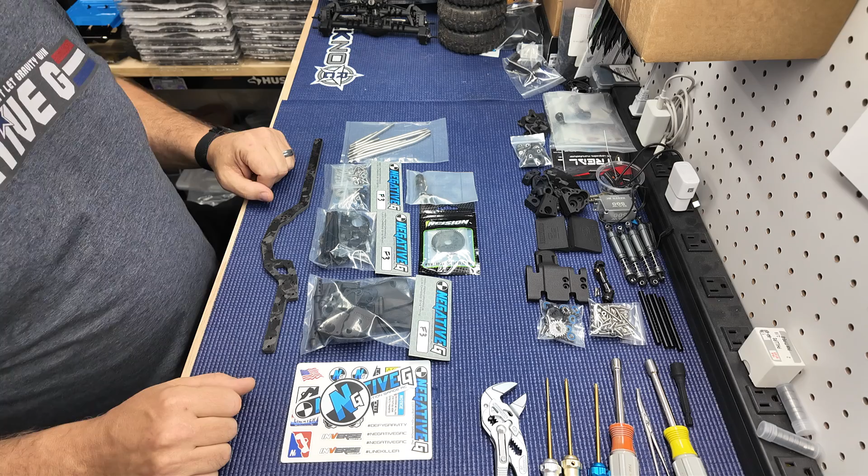Okay, here's the kit overview and contents. You get an XL sticker pack, you get rails of course, you get 3D printed parts - these are all printed on MJF machine and PA12 nylon. You get a hardware bag with screws, gears, shafts and that sort of thing. You get the motor plate bag, which has your motor plate, some carbon shock keys, chassis spacers, and a 2.4 millimeter drill bit.

You get a spur gear, genuine incision 52 tooth spur gear. You get the Negative G branded little baby prop shaft, and also included in the kit is a full set of 5 millimeter diameter titanium links. You also get your choice of servo on axle mount. This version in particular is a Capra, but there's also TRX4 and F10 servo mounts available. You can make your choice on the site when you order, and it will come inside your box. So that's the kit contents overview.

Let's get into the build.

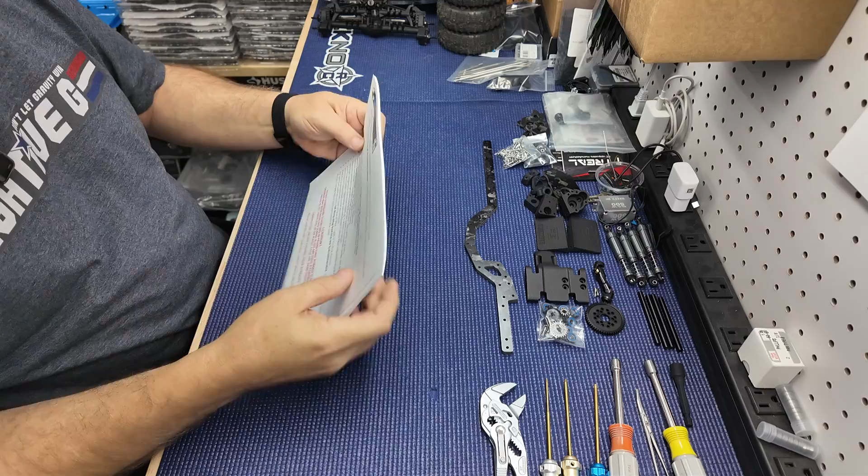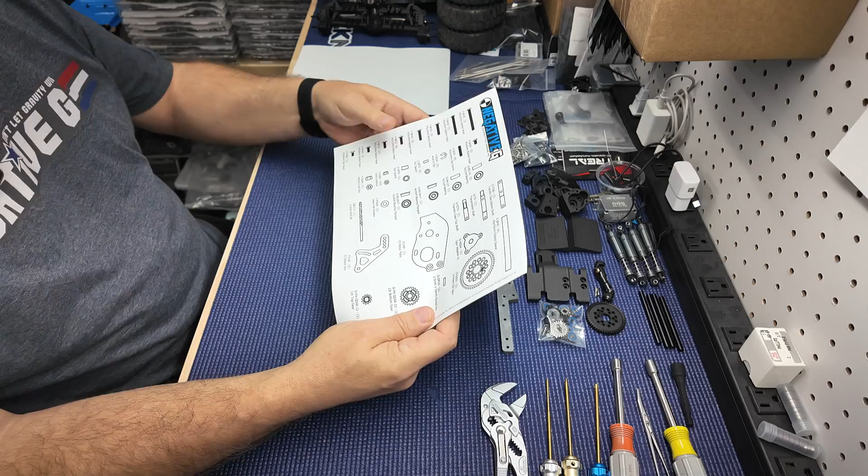If you are new to Negative G kits, you should know that you can go to negativegrc.com and hit the support tab at the top. There is a full set of instructions for all of the different kits available. Page 1 here is just some general information and some cautionary information at the bottom. Make sure you read through all of that, and make sure you read this entire instruction book before you start on your build.

Page 2 is just kind of a hardware overview of what's included in the kit. Page 3, drive shaft length recommendations, and that is pin to pin on the drive shafts. There's a couple different options - some on Amazon that are available. You can check in the Facebook group to get some recommendations from some of the users there, and Conrad has actually posted the cut to length ones that he uses as well.

Page 4, so the drill bit that comes with the kit is used to make sure that there's no support material left in any of the holes that you're putting screws into. You want to make sure that they're clear before you put any screws into them, and make sure you read the red text down here as well.

So page 5 is the transfer case. Anyone that has built a Negative G kit before will recognize this. If you're new, these are fairly straightforward to put together, and I'll show you how to do that. So let's get started. Page 5 is the transfer case, so let's go ahead and get started on that. You want to pay attention to the assembly order for the bottom shaft down here, that's pretty important.

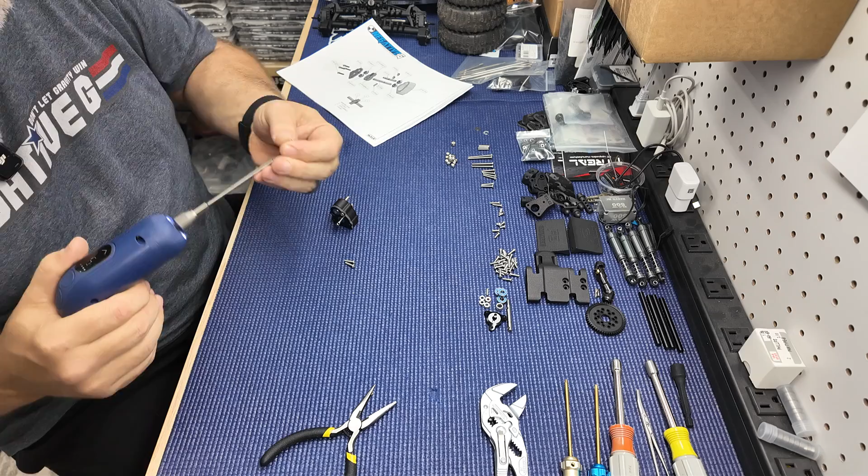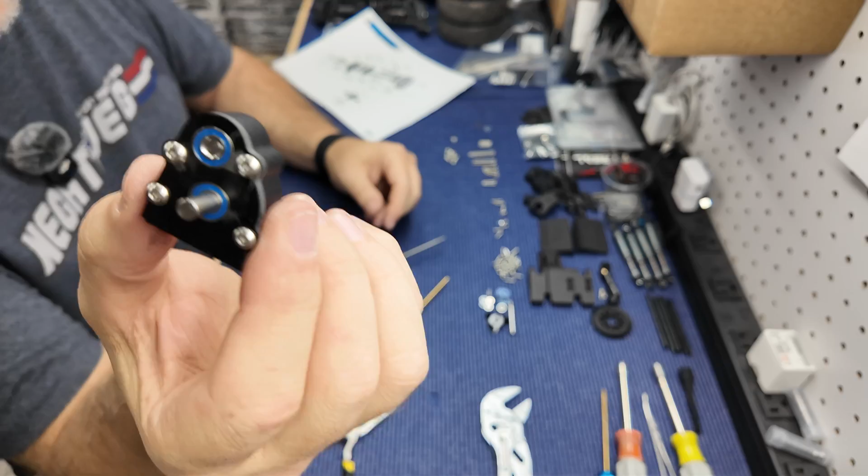And there you have your completed transfer case.

Let's go to page 6. Okay, page 6 is the transmission. Let's get to work on that. You need to pay attention to this note - it says that the part number on this mount needs to face the frame rail.

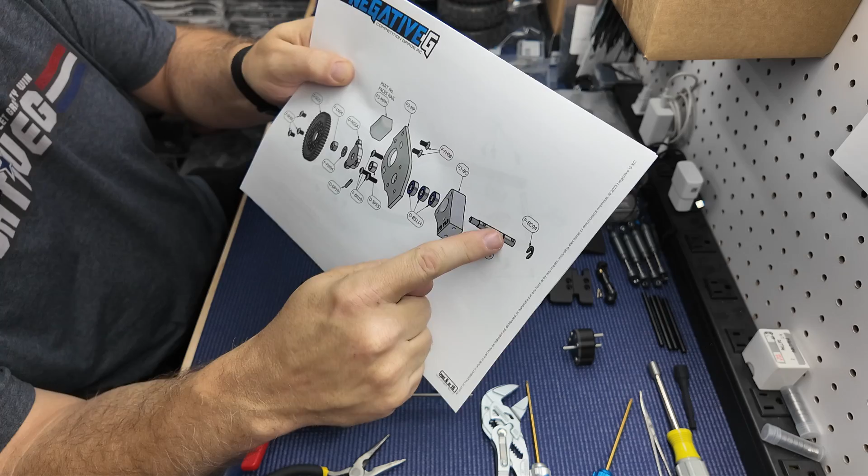There is your completed transmission. Make sure you're using your flathead screws to put that mount on, and just be aware of the order that everything stacks into the bearing case here, and you should be golden.

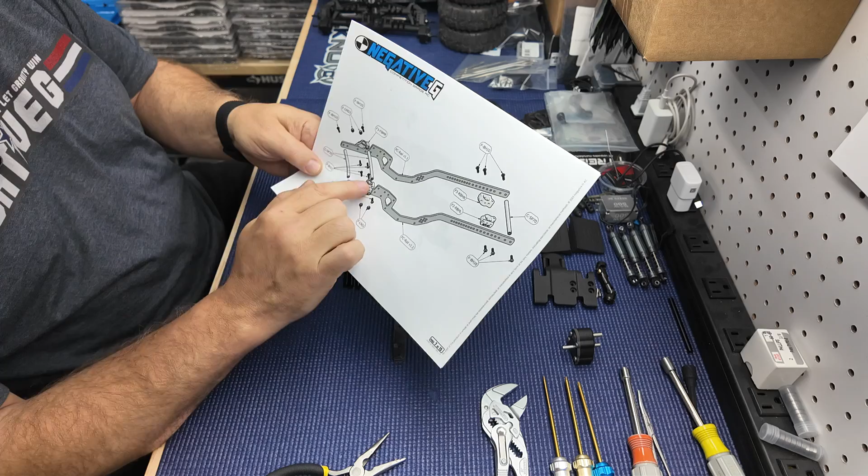So let's move on to page 7. Page 7 is doing a little assembly of the main chassis rails and the body mounts and a few cross members. One thing you need to make sure is read your red text down here - make sure you put the body mounts on before you put the rails onto the spacers. It's a lot easier to get the body posts mounted to the rails before you put the rest of it together.

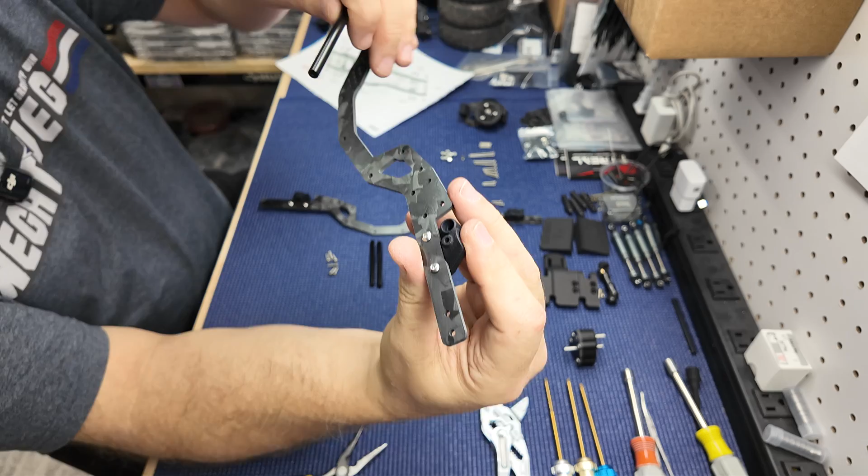You want to put the spacer that goes in between the front body posts first before the other ones, otherwise you won't be able to get it in.

Okay, that's page 7 complete. Let's move on to the next step.

Okay, page 8, installing the transmission into the rails. You need to make sure that you use the 8mm screws on the outside for this motor plate mount. And you need to put half of the prop shaft onto the transmission, otherwise you won't be able to get it onto the transfer case if you don't put it in now. So let's do this step.

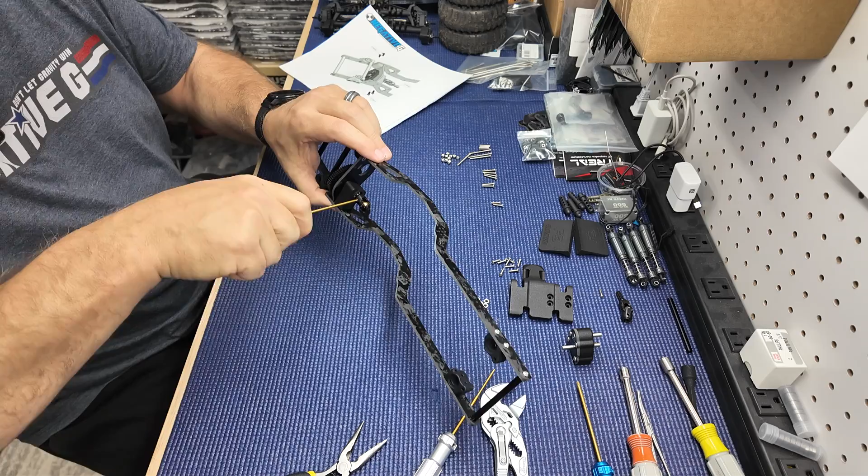And there you have the transmission installed into the chassis. That step is complete. Let's move on to page 9.

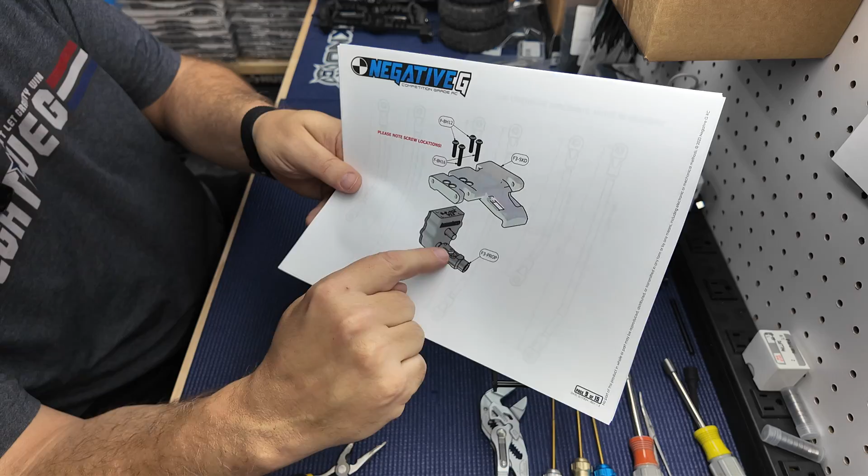Okay, let's move on to page 9. We're installing the transfer case onto the skid. Please note the screw locations - if you put the screws in the wrong holes, you will damage the transfer case housing and you'll have to order a new one. Also put the other half of the prop shaft onto the transfer case at this time.

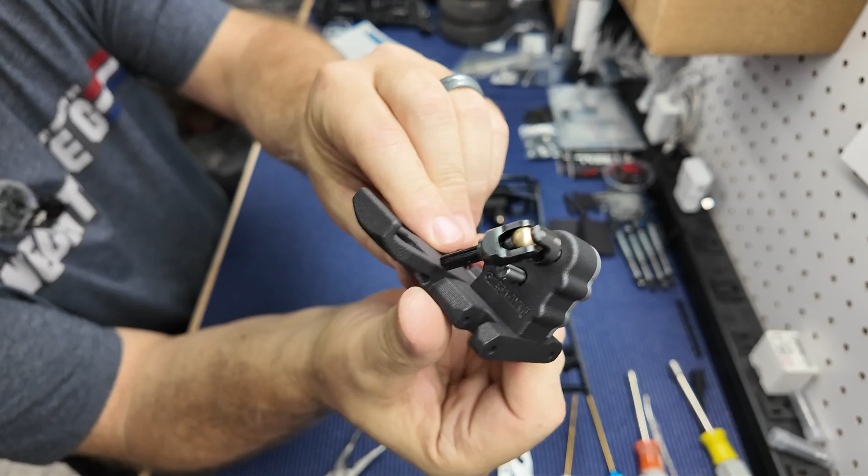And there you have your transfer case mounted to your skid plate. Let's move on to page 10.

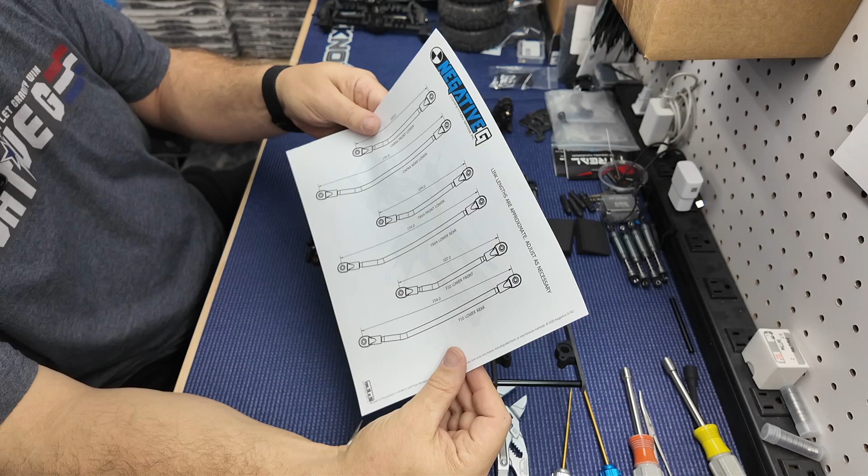Page 10 is the lengths for the lower links. They're all labeled depending on which axles you are using. Pay attention to the lengths. There's two different lengths of these longer links down here, and the long ones are the lowers for the rear, so pay attention to that. I'm going to go ahead and install all of my rod ends off camera because you don't need to watch me do that, so let's get to it.

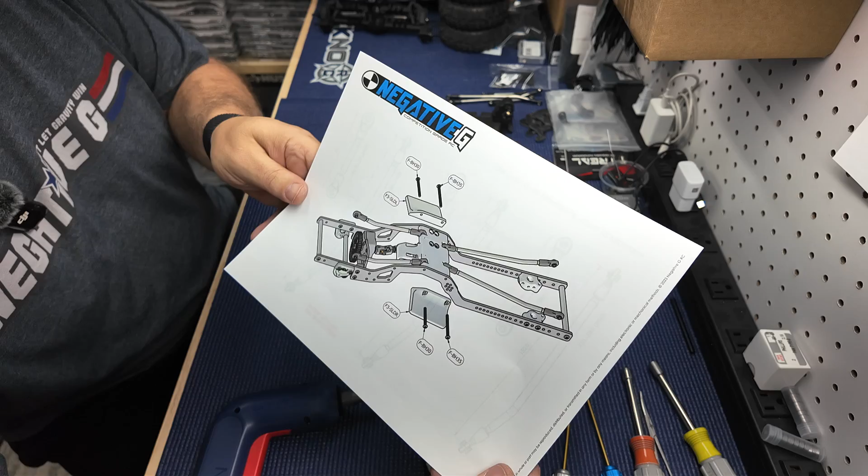Page 11, we're going to install the lower links, the skid, and the sliders all in one shot. So let's do it. Pay attention to the screw lengths. Long ones go in the rear.

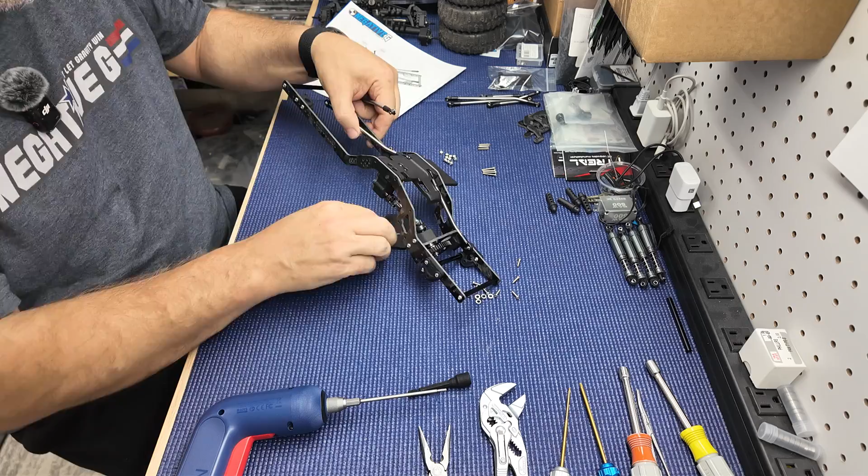Okay, there we go. We've got our lower links installed, our skid installed. So let's move on to page 12.

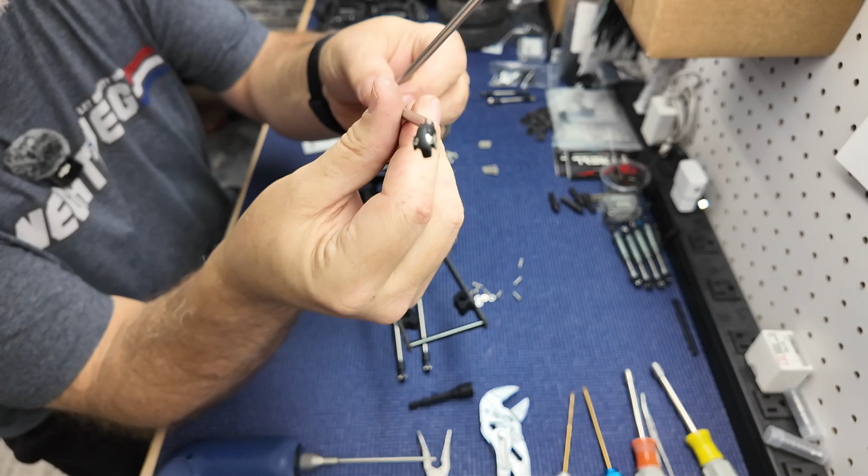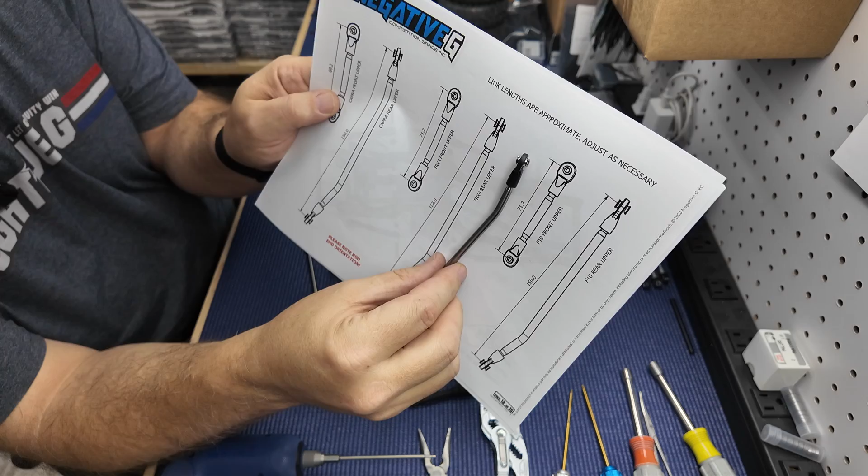Page 12 is all the lengths for the upper links. I've already put mine together, and what you need to pay special attention to is the way these rod ends are clocked. They are clocked 90 degrees from the other ones, if you can see that - you'll be able to see it on the sheet as well. So make sure you clock those rod ends the correct way.

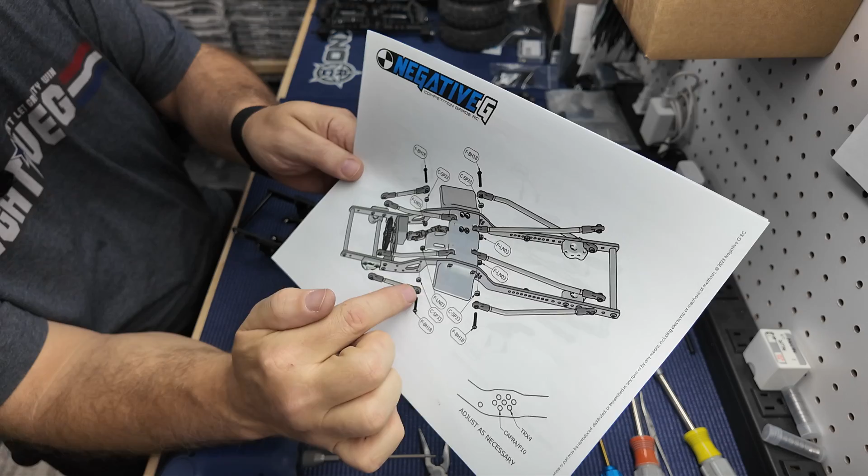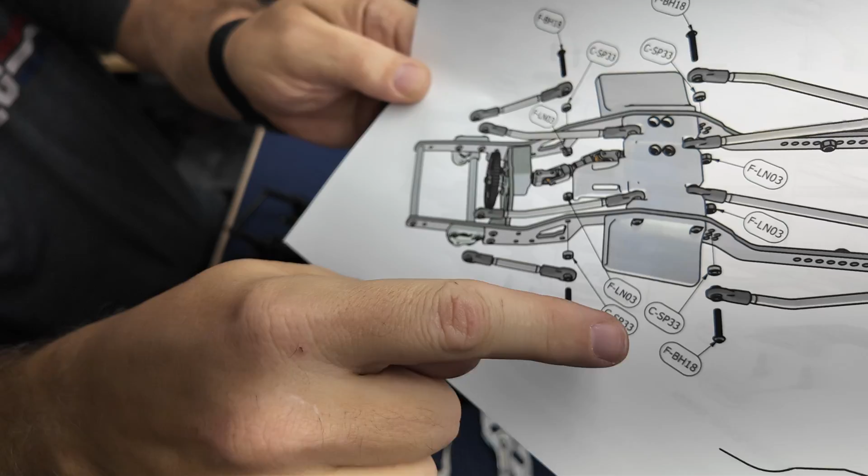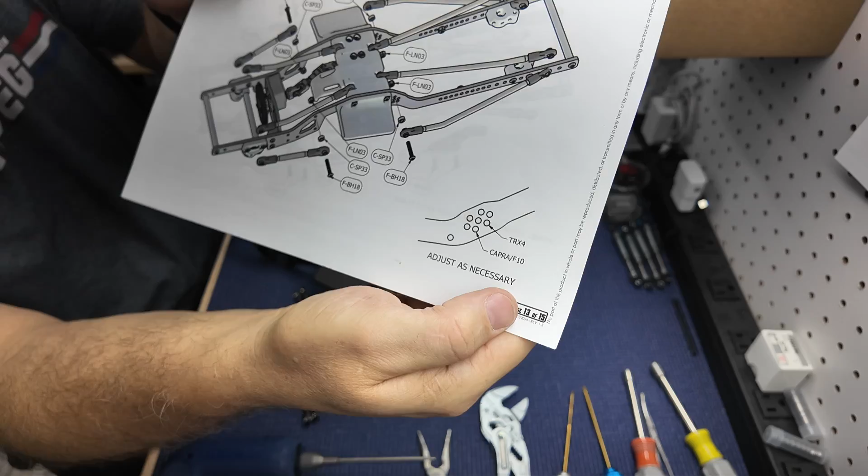Page 13 is upper links. Please note that there are spacers that go between the rod ends and the chassis, and pay special attention to which hole these go into. There should be a line on the instructions showing you which one they go into, and you can see the orientation of the rod ends on the upper rear links. Then here's a little key for you depending on what axles you're running - that'll give you a baseline. You can adjust as needed, but that's where you should probably start for adjustment. So let's get after it.

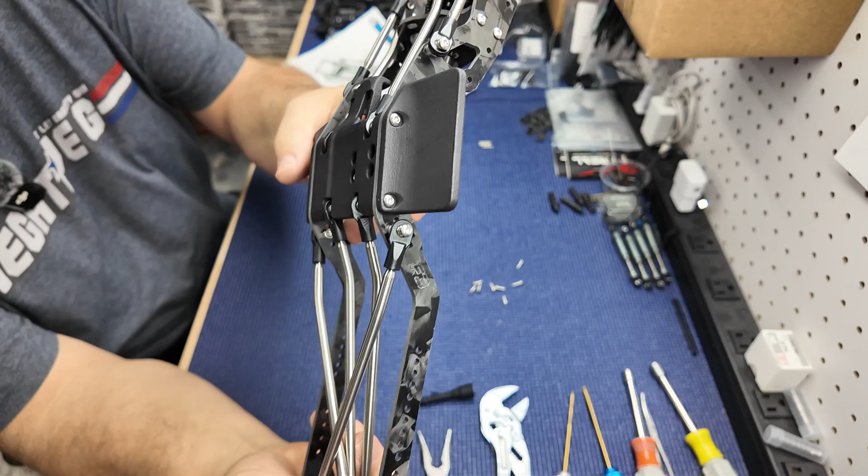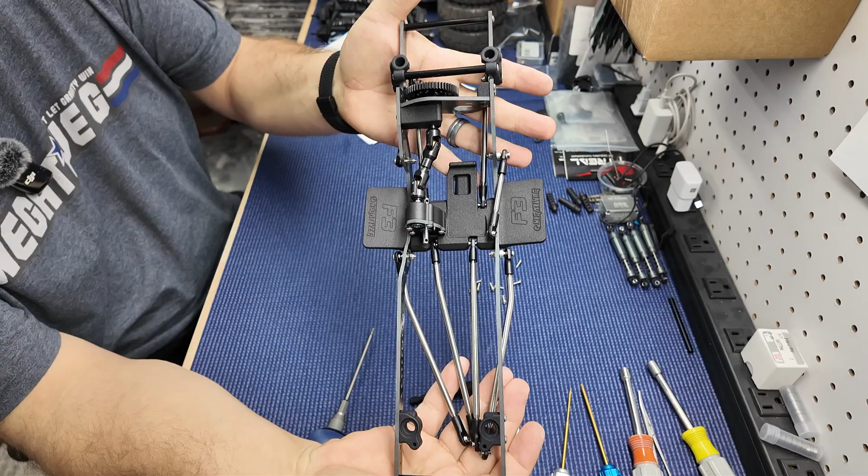Okay, there's the upper links installed. This chassis is going to be getting Capra axles in it, so I went with the Capra location. But there you go, all the links are now installed. So let's move on to page 14.

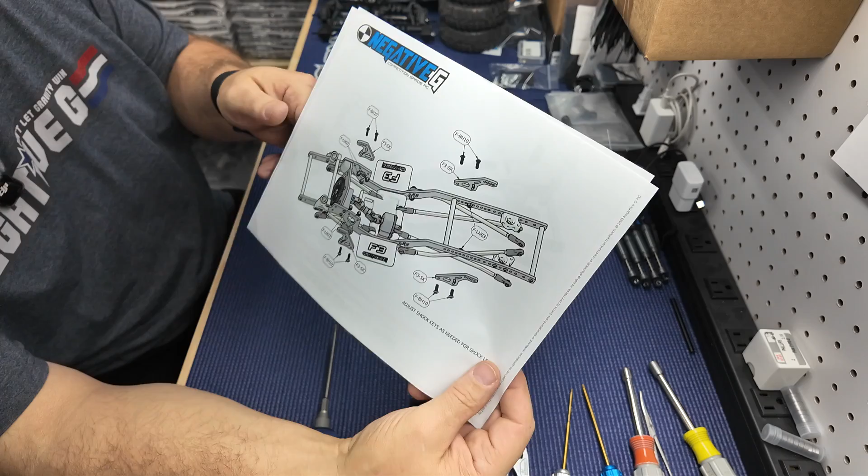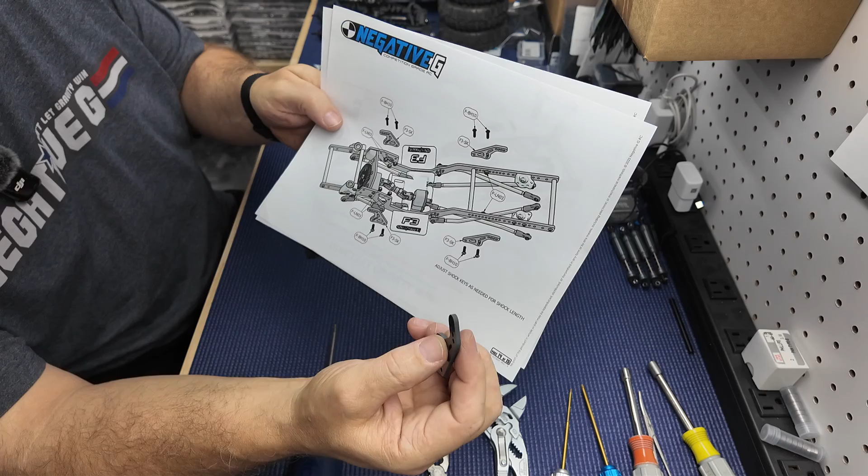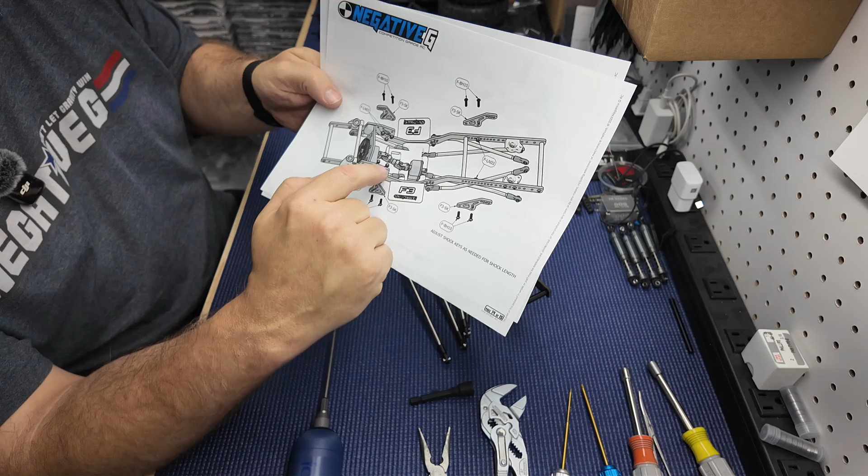Page 14, we are looking at installing the shock keys. This is one of the unique features about this chassis - it has adjustable shock keys, so you can run basically any length of shock you want at any angle you want. The rear shock keys have a bunch of holes for adjustment, fore and aft, to adjust your shock angle. The fronts' pivot is fixed, but you do have height adjustment on the front as well. On each key there are 4 adjustment holes to move your shocks around depending on where you want to put them.

Let's install these shock keys.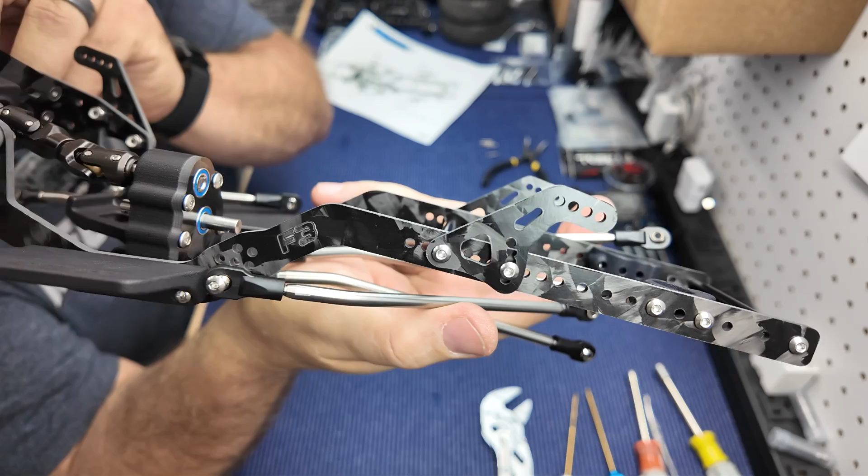Okay guys, got the shock keys installed. There's the front, the rear. You can adjust these however you want for what length of shocks you're running. Full adjustability. So that's the end of page 14. Let's go on to page 15.

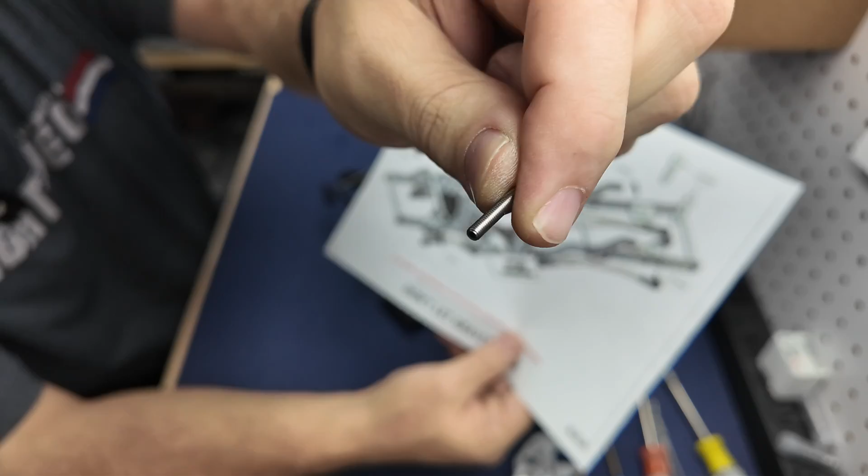All right, last page guys, we're just about there. This is the body post install page. You use these 3x16 set screws to put the body posts in. And here's a word about the body posts - you need to run them as low as possible.

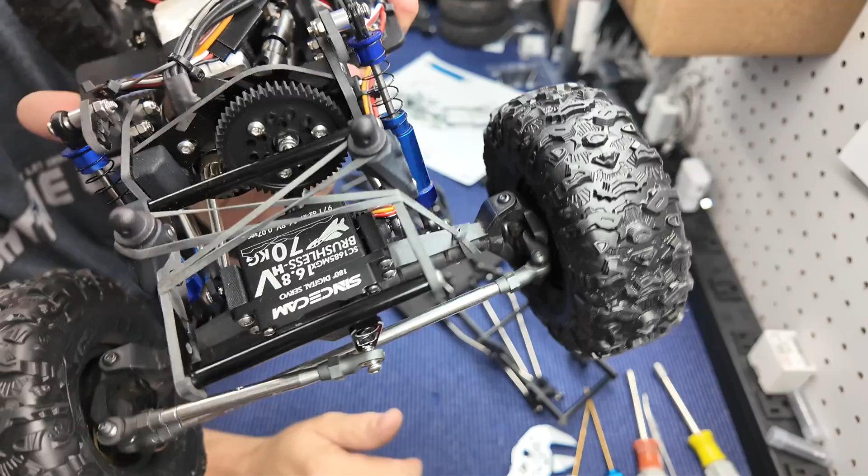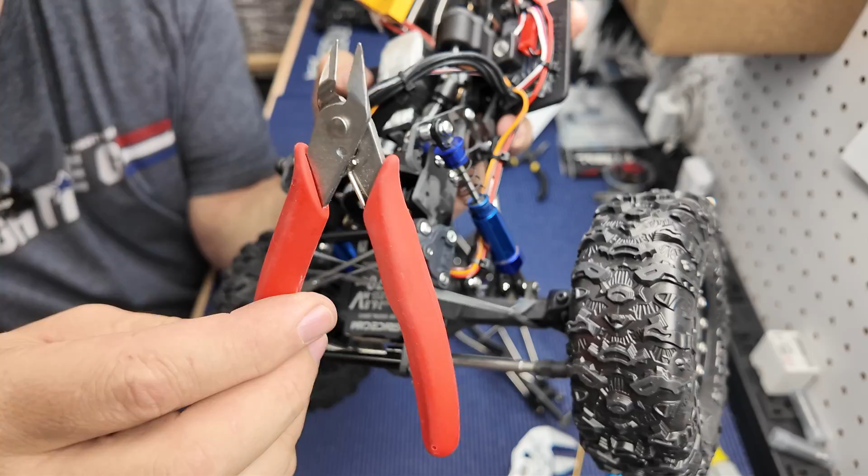So I'll show you an example. This is my personal F3. You can see I'm running these extremely low - these are as low as possible, and you have to trim them to get this low, but that's fine. You can just use some flush cuts or whatever, and you can trim them to get them super low. And then if you're running a half cab mount, you can see here, that's how low I'm running them in the rear.

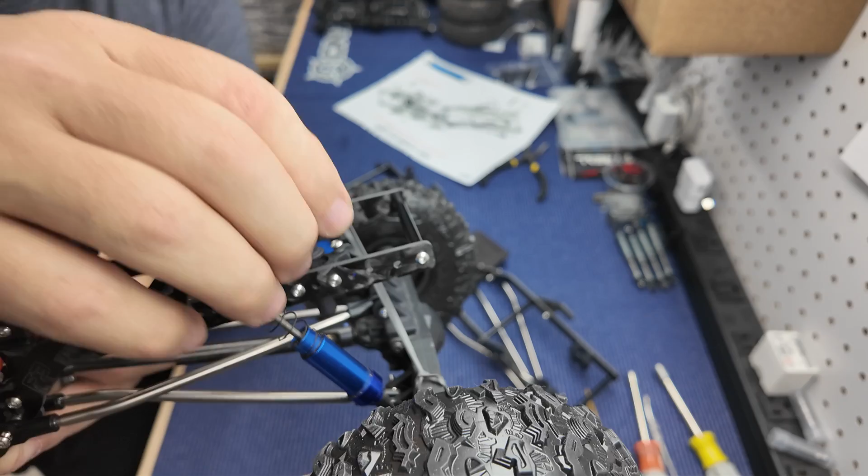I would also highly recommend, if you're going to run a full body on this thing, to run them in these rear mounts. I would run them maybe one notch up from the bottom at most, and then just trim your body to fit around the shock towers and slam that body as low as you can. It is a cheater rig after all, so run them low.

I just want you to know that if you run them at the tallest position in here and have them sticking way out, and you take a hard tumble, there's a chance they could snap. So just want you to be aware of that when you're installing your body posts.